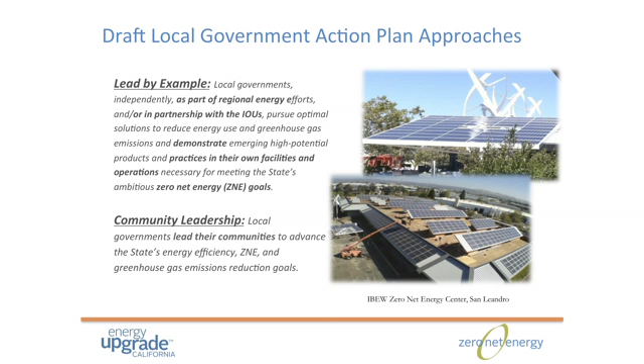We're doing a lot of action plans, so you may have heard of a local government action plan. These are just some examples of ways: community leadership, leading by example. This is really vague kind of terms. These are the kinds of ideas going into a draft local government action plan being developed right now, led by Joseph Oldham. So you'll be hearing more about that.

I don't want to go through all of these because we want to get to our speakers, but I also wanted to mention that we've worked on a zero net energy residential action plan. It's been a long time in the making, and it's making its way through the final review process now at the Energy Commission and the PUC, and we hope to complete that soon.

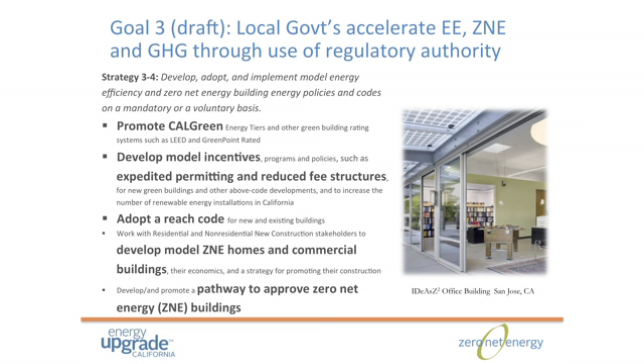We do have this website up as a resource if you're interested in residential homes and what's going on in that space. The utilities are launching a pretty innovative new residential new construction incentive design as of July 1st this year to go along with the code. So if you're interested in learning more about that, why don't you go ahead and talk to me later.

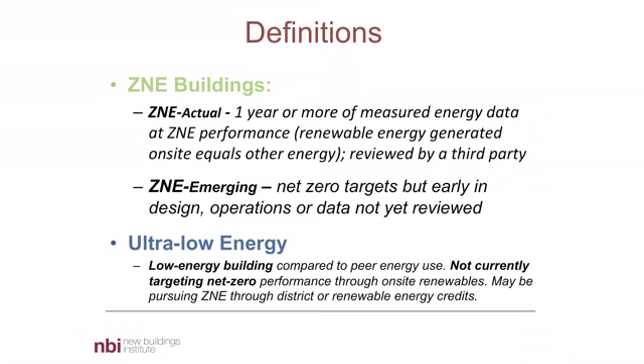This is really important because this is the leading edge of these. From our perspective, and I think this is beginning to be more broadly shared, while it's elegant to produce your energy on site, that's not the only way to go. Equally important to us is what we'd call ultra-low energy buildings that have about that same level of energy performance—using maybe a third of the energy of a standard U.S. building or lower. For the more technical among you, these buildings would generally be below 30 kBTU per square foot, varying by climate and building design.

But you can get the renewables somewhere else—from a community scale project, and we're seeing more and more of those, especially on university campuses and Army bases. Fort Collins, Colorado, which is not an Army base, is doing zero net energy, and we're seeing this crop up in other communities. Or you can just get it off the grid. Sometimes those options are cheaper, or, do we want to cut down all the trees to get renewable energy? Or what do we do with high-rise buildings, where it's very difficult to get PV on them?

We think it's equally important to track these things. We just redid this study, and as you can see, before we had just under 100 buildings, and now we're up around 200. This thing has doubled in 2 years across the country. A lot of these are in this emerging category, so we're seeing real growth.

In many ways, for those of you who've worked in green building, this parallels the initial early-year growth of the U.S. Green Building Council and their LEED rating system. We've got a wide variety of buildings showing up—small and medium commercial offices, and not just commercial offices, this is a big need for local governments too. A lot of what you're doing is smaller office buildings. K through 12 schools are coming on strong, and in combination with universities, about half the projects now are education related.

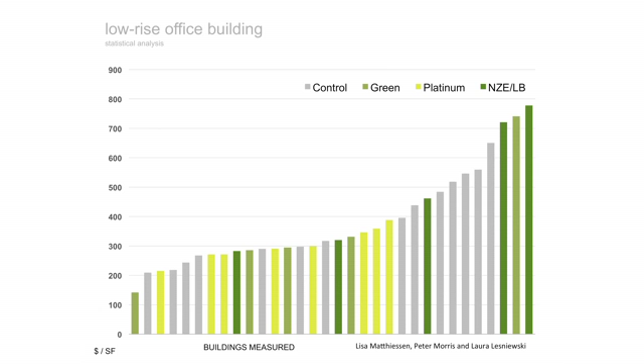So what's interesting is that net zero energy buildings, or buildings that meet the living building challenge, are the really dark green buildings. Just to interpret this graph, every bar represents a building, and these horizontal lines represent $100 a square foot, $200 a square foot, 300. So you see, as most people would expect, we've got a couple of very expensive buildings that were built to living building or net zero energy. But you see, somewhat unexpectedly, that we've got some dark green buildings that are right down here in the average cost of construction.

And what we've found so far, it's hard to look at a couple hundred buildings and say you have a strong data set. You have a lot of stories is what you have. But we've found that there are a group of buildings that get built for the standard cost of construction, and there are a group of buildings that get built between 12 and 15%, maybe 10 to 15% additional cost. So this thing is not fixed.

So it's not like I can predict the cost of construction for any building you might want to take on. What I can tell you is that if you make net zero energy a priority in your cost of construction, there's a lot of opportunities to trade things off in commercial buildings. Just to mention one, a lot of commercial buildings have a lot of glass on offices. If you actually replace the glass with an insulated wall, the building costs less and it performs better. So some of these things are very simple.

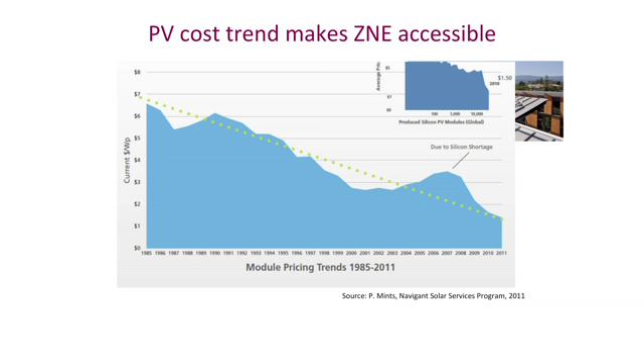Orienting the building correctly and those sorts of things are really important. So these are all good things to take a look at. And PV costs are just going down. This is affecting the general PV market, and I won't get into that, but it's also important for net zero energy, since we're changing the economics of these things as we move ahead.

We just completed, in conjunction with a couple of key partners - again, the International Living Future Institute and Skanska, which is a major contractor and developer - a study for the District of Columbia. D.C. was asked the question: what are we going to do here at the center of U.S. government for our future construction? Can we move to net zero and the living building challenge there?

I see I'm missing a slide. I tried to replace this slide, but it's my fault - I had a slide that blew up because there were too many graphics.

This is a standard building built in Iowa, and the state of Iowa put a little label on it saying, this is every building - because it's a two-story concrete tilt-up structure that looks just like so many other buildings you've ever seen built. But it's very low energy, not zero net energy - excuse me, they've got some renewables, but not all renewables. So this is an extremely efficient building that will put some renewables on there.

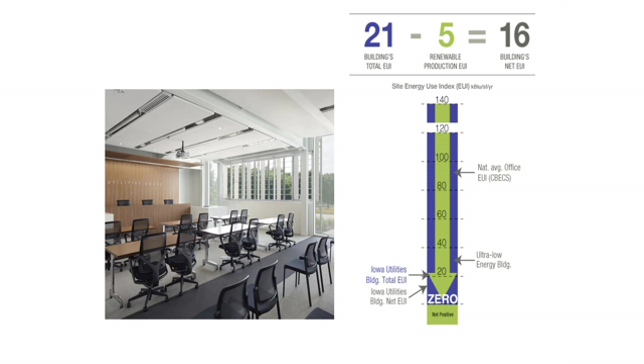But you can see this is actually a hearing room that's daylit. How many hearing rooms have you seen that are daylit and have good control on the daylighting so you don't get too much daylight penetration? So it's good for reducing lighting use, and you can also reduce cooling use from these sorts of strategies. This next one I'm going to go through a bit because I think it's a great story.

A local architecture firm decided that instead of building themselves a new office, they'd take this thing on. They weren't dissuaded when they walked in and saw the state of repair. I'm mentioning this because coming out of the recession, there are a lot of buildings out there - it might be a strip mall, lots of different kinds of things - but we've seen some interesting net zero energy buildings built in strip malls. The building you mentioned, DNR, is in a standard suburban-looking one-story office park. We see those kinds of things go on.

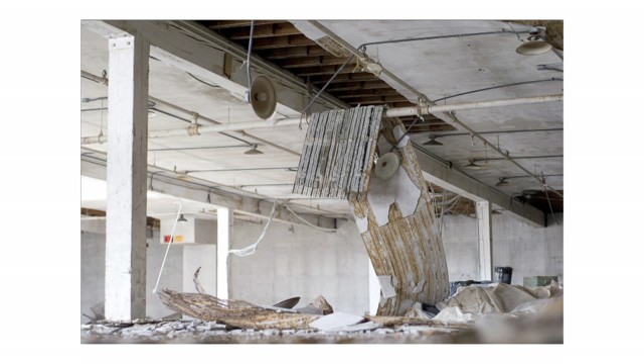And the daylighting - this building had some natural daylighting. A lot of buildings have some natural daylighting if you can exploit it. And what we needed, like in our big pavilion over there, was these big-ass fans - and Big Ass Fans is actually a brand name. You'd think people would be quiet about it, but you'll read reviews where it says the heating costs this much per year, the lighting costs this much, and the big-ass fan costs 0.5% of our energy to run.

So these things are well-known, but they're designed to serve giant spaces, and they work pretty cool. This brings it back to the definition of community. You take something that looks like that building did, unoccupied for 30 years, and bring it back, and it becomes a center of your community. While this is an architect's office, it now serves multiple functions, but this could be any kind of office space you could have.

So that's my presentation in a nutshell. We have a ton of information for you. One of the things we have is we've looked at 9 different policies—I included 8 of them here—that you can look at to advance net zero energy within your communities. A codes roadmap, so stretch codes and CALGreen, all that kind of stuff.

Benchmarking, I think I've heard a lot about that. If you've got a muni utility, rate policies can be really important. There's some major fights around the country these days on net energy metering. And utility programs, I don't have to tell you about that. There can be incentive programs and savings by design—CHIP is certainly one of those—but those are different options. There can be different kinds of tax incentives or other incentives available within local government, density bonus, fast permitting, or some sort of local taxing district.

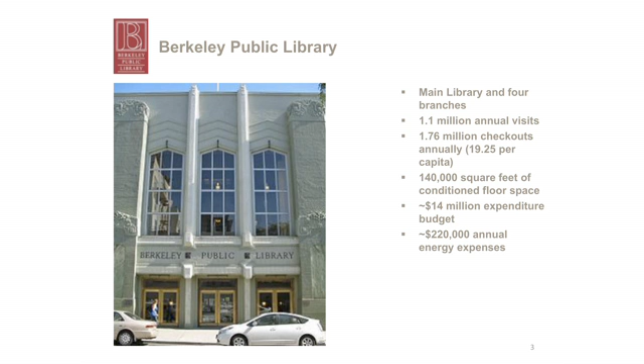So a little bit about the Berkeley Library - it's one of several branches. We've got major circulation in Berkeley, and there's a lot of interest in this. We've got a fairly large budget for the libraries - $220,000 annually out of a $14 million budget - but the energy is substantial and it's something that needs to be controlled and managed so we can provide better services.

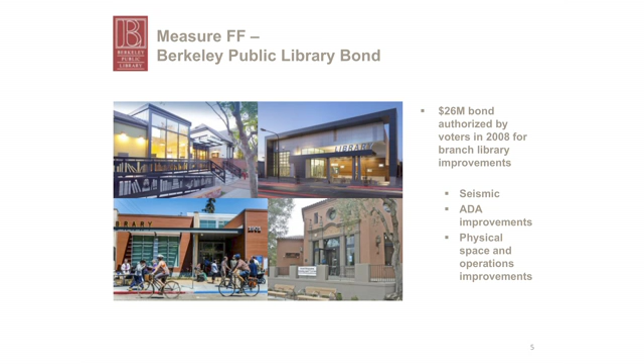So the policy drivers behind this are a climate action plan, which has goals for 33% reduction in carbon emissions from city facilities by 2020, and LEED Silver for all new construction and renovation in the municipal sector. That's not such a high goal, but it was something that got us started. And then the driver for this project was that there's a $26 million bond issued for seismic improvements and ADA improvements, and we used that to make a zero net energy building.

So in answer to the question, what do you have to do to get one of these? You have to ask, right? And we asked indirectly through our policy drivers - I think we would have done it differently if we had known what was possible. We would have asked for a design alternate that would include zero net energy. As it is, we didn't, but we referred to our city policies in the solicitation, and the best response we got came from a team that proposed a zero net energy building.

And I'm going to be fairly short in my presentation. I'm going to turn it over to Jared so he can talk to you about how that building functions. But I wanted to let you know about how we procured it.

The design effort was fueled in part by Savings by Design, the statewide utility-funded program, and they covered basically the design increment of the design cost for this. This was essential because the capital cost didn't turn out to be that much - the design cost turned out to be the major increment, and that funded a lot of the upfront architectural work, which was essential to making sure they could actually bid this project and complete it.

It was all modeled by PG&E, and PG&E helped the design team come up with this plan. The metrics on this project: $7.5 million total budget. Again, the incremental cost, about $60,000, was covered by PG&E Savings by Design. We estimate about a $250,000 incremental cost for the capital, but the building came in under budget, and in part we think that might be due to the fact it had less mechanical systems in it.

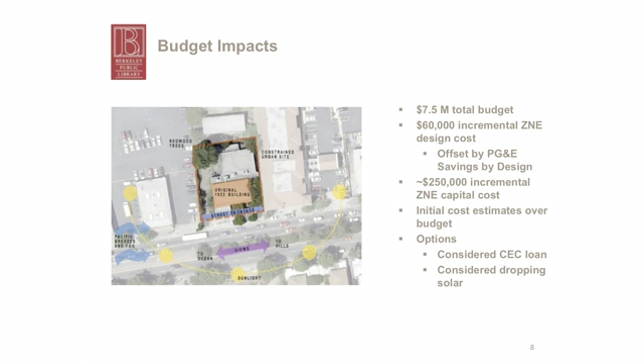And we thought of different options for funding it. We thought about a CEC loan. We considered dropping solar, but when it came in under budget, we went ahead with it anyway.

I want to spend most of my time on this slide, because this is the actual building performance on 15-minute intervals, averaged from January to May. And what you'll see is really obvious - we have a base load running. We're not quite sure what all of that is. We'll get into that.

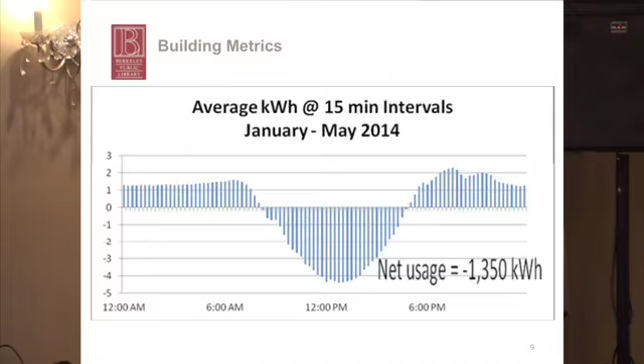When the sun comes up, we are generating. In the first 5 months of the year, we generated a little bit more than we used, so it's performing pretty well so far. We started hitting zero net energy in March. January and February we were a little over, but as of March we started going under the wire.

Dave talked about the importance of operations in this, and this next slide will show, yeah, operations are important. This is a brand new building. This is PG&E's meter, and this is the sum of the 4 panel meters that we have. That gap looks rather small, but when you add this gap to this gap, it becomes really big. Basically, the difference between the 2 meters is basically double.

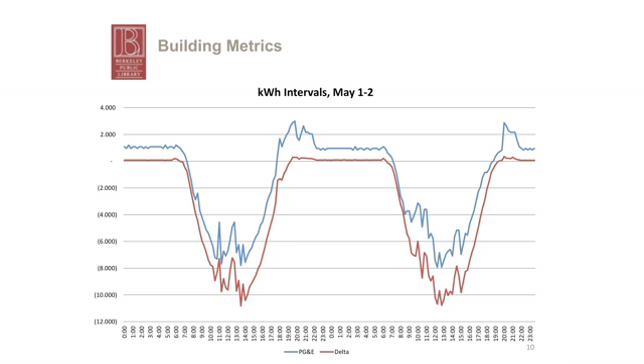So we've got to close that gap. The other thing we find is that we have a fairly large base load according to PG&E's meter, so we've got to find that. Right now, since our panel meters aren't working well, we've got to calibrate those and then find out what that phantom load is. So we're pleased with the way it's operating. We're hitting zero net from here. We know we've got some more work to do to calibrate it and tune it up and make sure it continues to operate at this level or better.

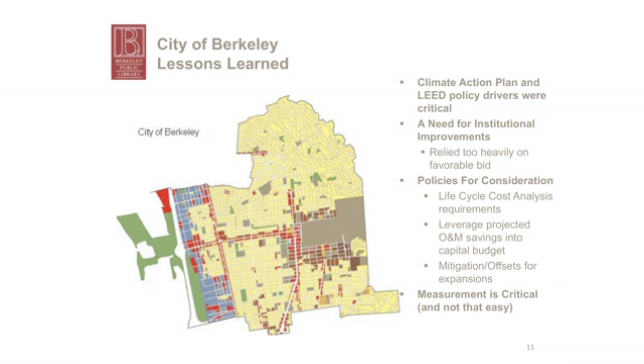A couple things I want to close with before I turn it over to Jared. Policy drivers were important. We relied too heavily on the favorable bid. I would have liked to include zero net in the solicitation document next time. Policies that would help are life cycle cost requirements for solicitations, leveraging O&M savings into the capital budget. These are basic things that are fairly hard to do in local governments, but we need to figure out how to do it, and also mitigation offsets for expansion. If we do expand city facilities in the future, we need to say we've got to offset any of those expansions with improvements elsewhere or on that site.

And that's it. I'm going to turn it over to Jared.

Thank you. I'm Jared, the project architect on this project. To somebody's point about architects going to sculptural school, I went to Cal Poly, so all my undergraduate years were about straw bale and climate responsive design. This project speaks a lot to my career.

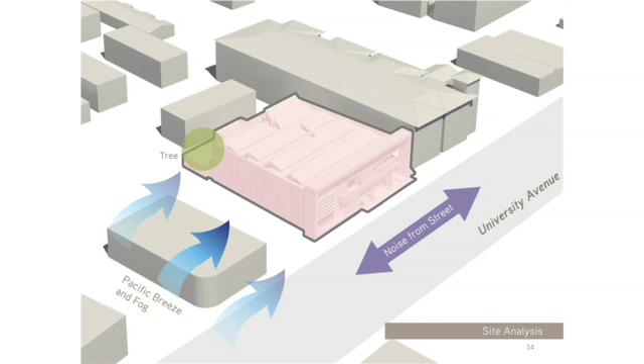It's a great project. To give you an idea, if you've never been to Berkeley, it's right here on University Avenue, a major thoroughfare with lots of trucks and heavy traffic. We have the bay all the way down here, which is great because we get breezes coming from the bay over the building. There's an adjacent 4-story building on University Avenue, and we designed this building with that in mind.

If you were walking down the street where the existing library was and didn't realize there was a library there, you'd be forgiven, because very few people knew there was a library there—even the people who live in the neighborhood. I'm joking.

One of the things that's really important is to understand your energy budget and to know how much power you can generate on site. We did a lot of energy modeling in this project, and it's really important. If you're going to go for a zero net energy building, you have to do that. The energy modeling is critical, as well as your climate analysis of the site. You really have to know what the weather, the sun, the wind, and the terrain will do for you on that site.

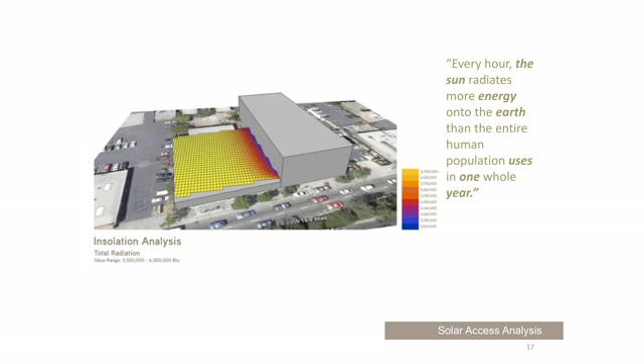One of the things we had to do was understand that there's a 4-story building next to us and a strip mall to the west. They could build a 4-story building next to us in the future, so we know the max height in that zone is going to be around 4 stories. We did various studies to test different roof heights and settled on 24 feet, which would minimize any shadowing on our PV, since PV was going to be what we used to generate power.

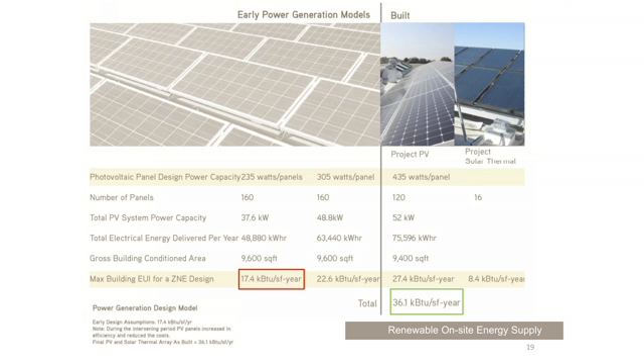When we first designed the building, our energy budget was 17.4 kBTU per square foot a year. As the design progressed and PV technology improved, that number started to increase. By the time we bid the project, we were looking at 435 watts for the same price. So for the same effect, with 40 fewer panels, we now had 36.1 kBTUs per square foot per year—double what we initially planned for, and we're not even counting solar thermal yet.

Climate analysis: these are the wind roses, showing you where the majority of your wind is coming from. Psychrometric charts give you strategies for incorporating passive design into your building. This is a comfort chart showing where the comfort zone is based on the median temperatures throughout the year in Berkeley.

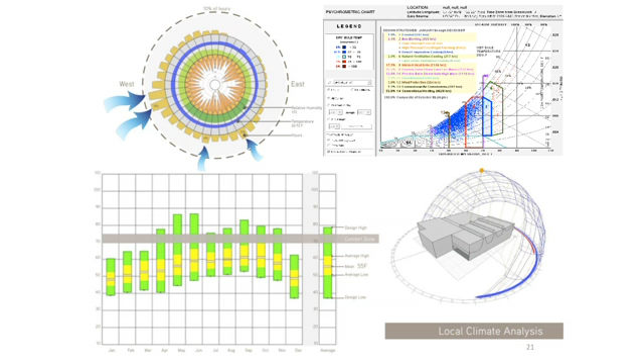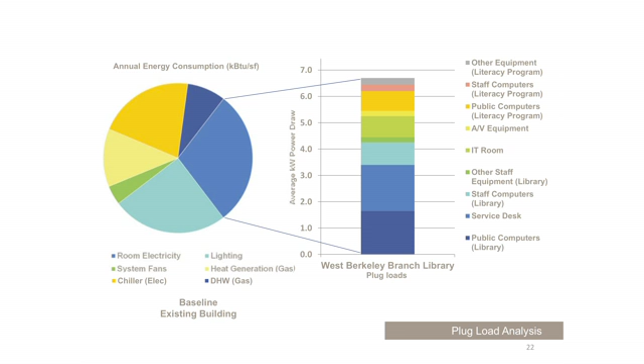We did a lot of daylight analysis, since daylighting plays a very important part in this building. One other thing I encourage everyone to do is look at your loads—these are your plug loads. The building itself you can somewhat control, but plug loads like computers and printers are cultural, based on how people work. If you can redefine the way people work in the building, you can substantially reduce the amount of energy the building uses.

Daylighting analysis—we ran through and looked at the amount of light coming through here. I'll have a lot of photos later showing the quality of light in the building. If you can daylight your building properly, you can cut down on the amount of lights on throughout the day. Here, for example, there's lots of sun outside, yet we have lights on—given it's a different kind of building.

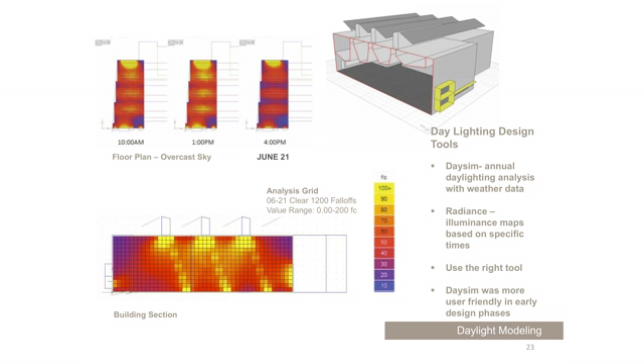CFD, computational fluid dynamics. If you're going to do a passive design building like this, you need to know how the wind will work with your building. As I mentioned, we had a lot of traffic on University Avenue, which means a lot of noise and dust. At the same time, the cooling winds we want from the bay are blowing from that direction.

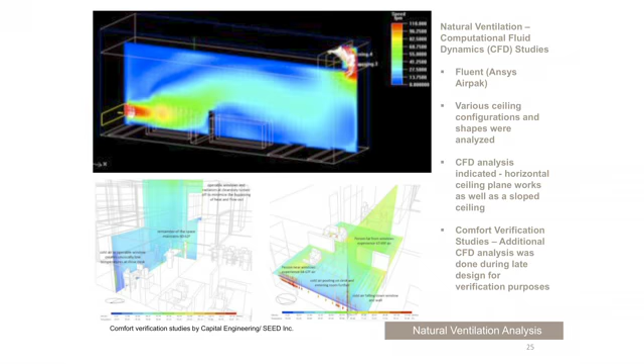So one strategy we came up with was, instead of having windows on University Avenue, we created a wind chimney set back from the avenue. When wind blows over the building, it creates a negative pressure zone there, pulling warm air out of the building, which is replaced by cool air coming in from the northern part of the building, moving right through the space.

One thing we did during late design was carry out comfort verification studies, because the client needed to feel comfortable with the idea. When you go through this process, people who buy in at the beginning may change their minds since it's still fairly new—it can be very scary. So we ran a number of comfort verification studies to show that what we designed would work in almost all the spaces.

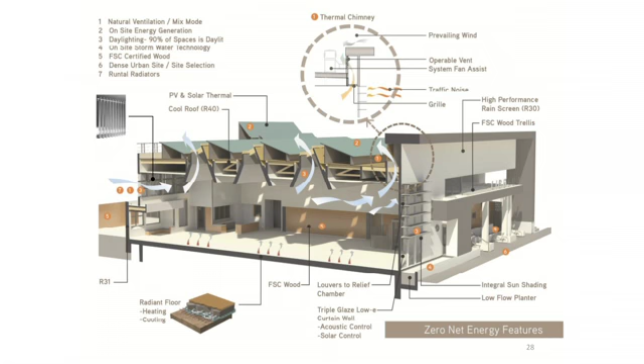In the heating season, we have radiant floor heating working off our solar thermal system. We have three small package units on the roof that generate supplemental heat when there's an overcast sky—those are all electric. There is no gas in this building, none, so it's greenhouse gas free.

In the early cooling season, as we move into spring, the wind chimney opens up the windows here, and we get breezes coming through the building—cool air moving through.

It's not a breeze, you won't actually feel a breeze coming through here, and it vents out this way. When it gets warmer, the skylights open up and the hot air goes out.

Everything is tied to the building management system. When it gets warmer still, we have fans, big-ass fans, and they come out and vent through the building also. The fan creates air movement, and that adds to your comfort.

And then when it gets really warm, the windows shut. And then those three heat pumps we have on the roof generate supplementary cooling through the radiant slab. And we can still vent.

Now, the one thing about the heating season is that when all the windows are closed and we're using radiant floor heating, well, you need fresh air, right? So the windows will open when we have sensors all throughout the building. When they detect higher levels of carbon dioxide, the windows will open.

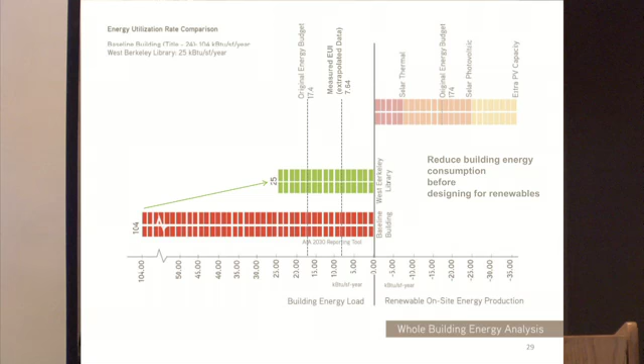So this is our energy model that we created. The AIA 2030 reporting tool says for libraries throughout the nation, the energy utilization rate is 104K BTUs per square foot a year.

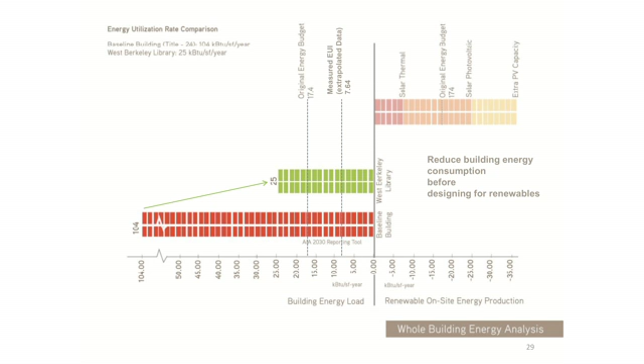Our target was 17.4. We have to use Energy Pro to model our energy because of Title 24 in the state of California. If you guys have played around with Energy Pro, it doesn't understand radiant slabs, and it sure doesn't understand passive ventilation, so it thinks our building's at 25. In reality, back in May, we were at 7.64. We're actually now in this region because we're positive.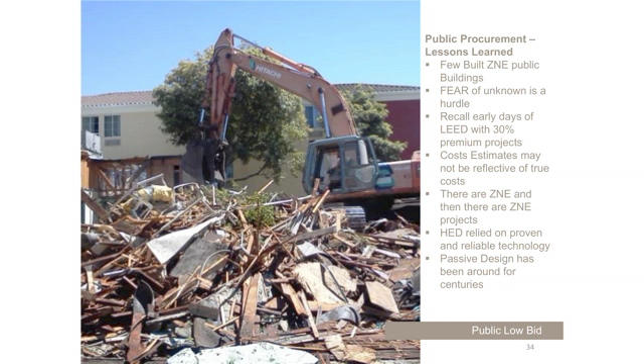So even though we have the governor's mandate out there for 2025 for state-owned buildings, even though we have the 2030 goal, we have 0 public buildings. So once we are verified in about 6 months or so, we'll probably be the first public zero net energy building in the state of California.

So how many contractors are going to have experience with ZNE? Zero. So when the contractor bid on the project, and it was West Bay, they bid low, right? On public projects, you're going to get that. They had no clue they were going to be building a zero net energy building, and I realized that when I got in. Okay, so I got to go through this really fast.

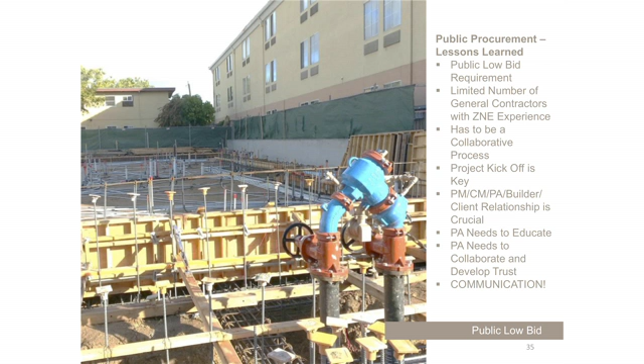I have a minute, so you got to work with them really, really well. The building's really complex, everything has to be figured out from the very beginning. Now I'll tell you one thing: we turn around RFIs and submittals in 3 to 5 days, way faster than usual, because we needed to help them.

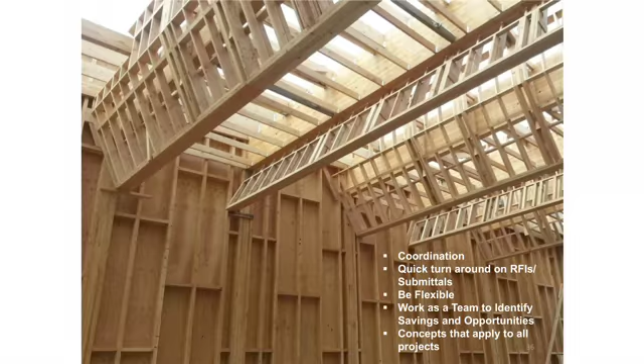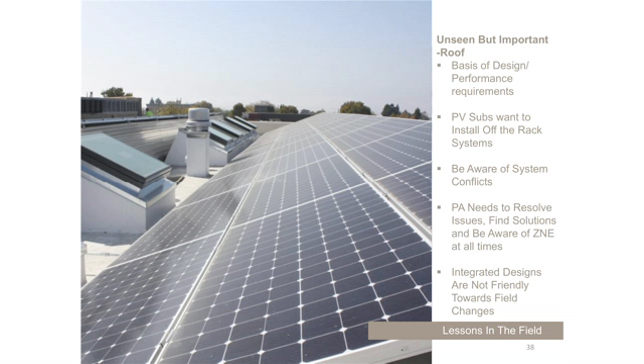Wood frame. Okay, this is the heart of the system, this is the heart of the building. These are renewables. And when you deal with PV, you got to remember it's design build, right? You have to define the design criteria, but they're going to want to come down there and plunk down whatever they want up there. If you don't tell them how to do it, they're going to drop whatever they can on your roof, and it may not be the way you want it to perform.

Solar thermal, everything's up on stanchions. This way you can re-roof the roof in the future and not worry about the technology.

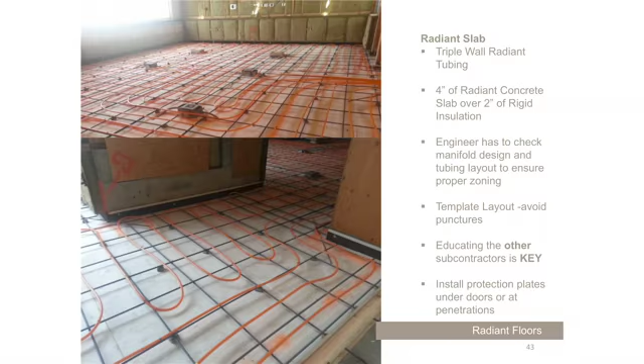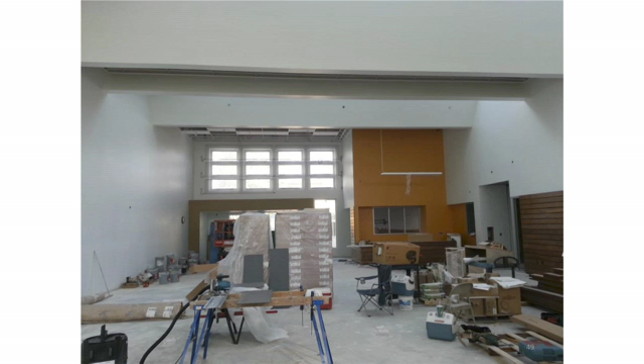Okay, radiant slabs, I'm going to go through this really, really fast. This is our natural ventilation, that's the wind chimney that you see there, that's when it's almost finished. And that's how the air flows through the windows on the north. This is all operable, and you can see the radiators on the windows.

Same here, this is the staff workroom. And then daylight—even when the building is under construction, the quality of light in the space is really nice. I call this a chapel, but it's actually a teen room.

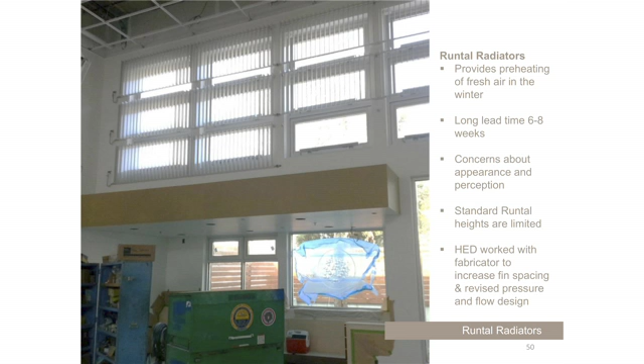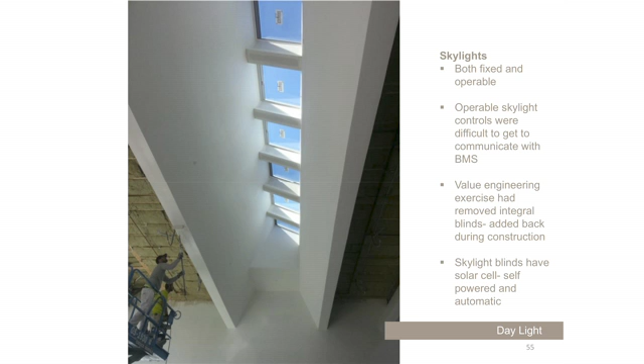Okay, rain screen system, I'll be done really fast. One of the things we did was help the contractor a lot by changing all our details. We changed our details in a way that reduced the amount of hat furring on the building by 30%. So it's a two-way street.

We use rock wool in the walls, so we have R30 in the walls using rock wool, and R41 in the roofs. So we got an extremely tight envelope, and the rain screen helps.

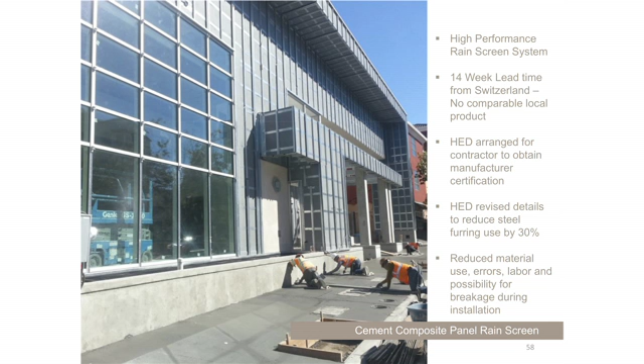So construction cost, $365 right? Our building, right, 9,400 square feet thereabouts. Estimate was 7.5, the bid was 5.5, right? Final construction cost was 5.56. That was 1.3% in change orders, final approved.

Okay, construction cost $592.30. Now look at the other libraries—these two are renovations, so they'll run about the same because renovations tend to be more expensive. South Branch, okay, 8,700 square feet, just a little bit smaller than us, their cost was $574 a square foot. If you're talking about premium, that's only an $18 premium, right? On a 9,400 square foot building, it's minimal.

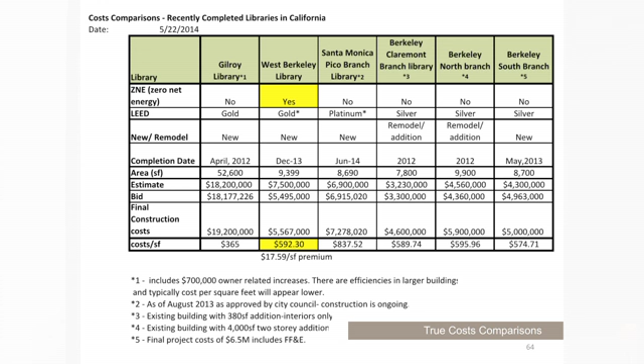It really is. Now look at Santa Monica Pico Branch—not to pick on them, there's reasons for it, they're going for platinum, right? We're actually on track for platinum. Construction cost 7.27, actually that's not quite final yet, I need to get those numbers. But construction cost was $837.52. So when people say there's a premium on zero net energy, I say, show me the money.

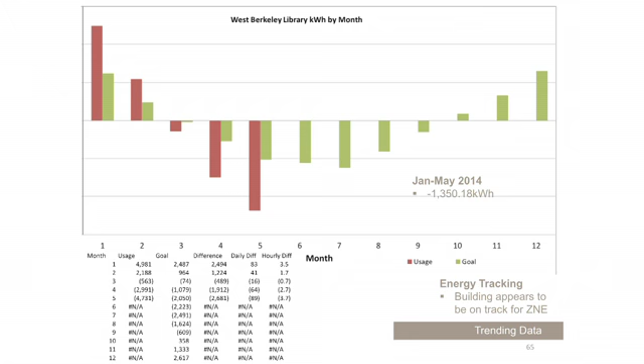Almost similar slides, you can see how the building's been performing. It's doing really, really well. If you go to this link, you can see an energy dashboard every day, and I'm on it every day just to see how the building is performing. It's sort of my hobby.

Photos, and like I say, if you want a tour, get the card from me. I actually have handouts for this—if you want a one-page handout description of the building, when I'm done I'll hand it out. Feel free to contact me for a tour. Thank you very much.

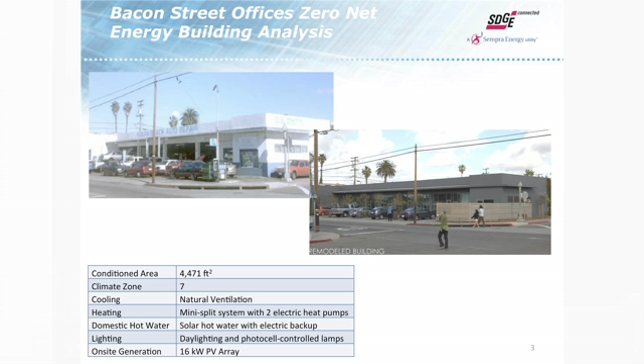That's about 5,000 square feet. It's got natural ventilation. It's got a mini split heat system that was put in just a year ago, because up to that point this building had been installed without one. This has been up since 2010.

The architectural firm, with only about 10 employees, made the commitment that they were going to go through the wintertime without heat. There were a lot of people with coats and sweaters on when you walked in there, but they made the commitment to do that. There's a lot of extensive daylighting, and there's about a 16 kW PV array on the roof that I'll go through and tell you a little bit about.

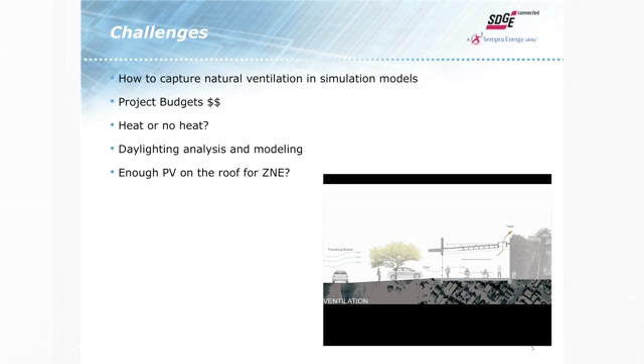Some of the challenges in the ZNE building that we talked about in San Diego, we've heard already—one of the biggest things was Energy Pro. It doesn't model natural ventilation. And if you got a building at the beach, wouldn't you want to take advantage of that? Which they did. One of the challenges we had as we were providing resources was how are you going to model natural ventilation in Energy Pro and take credit for it from an energy savings perspective?

So what we did is we hired one of the best guys in the country up at UCSD here in San Diego to do a computational fluid dynamics diagram for us, and he wrote a paper that we based a lot of our assumptions on for the savings this particular building could get. You can see down here, it's hard to see, but there are operable windows here.

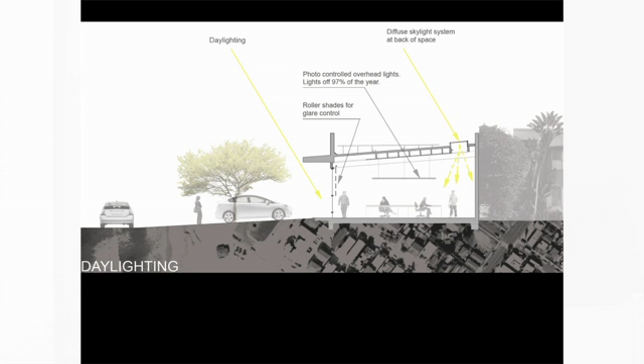We got windows up here, and it creates a natural stack effect. On a day like today, there isn't a light on in this building. All the windows are open, and all the skylights are open, creating a very nice work environment in here.

But we talked about budgets—that was the big thing with the owners. So we brought a lot of resources into this project to help offset some of these incremental costs we've talked about. They had the issue of whether to heat the building or not. They decided not to originally, and just a year ago, we put these mini splits in.

We did an extensive daylighting analysis and modeling, and was there enough PV on the roof to really make the building Zero Net Energy? That was one of the keys, because it's a fairly small footprint at only 5,000 square feet and not a lot of roof space, which I'll show you.

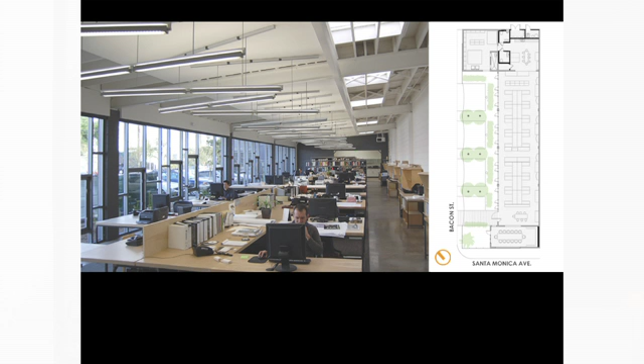Here's a bigger diagram of that. So we got a lot of the daylighting coming in through here for them. These are all Super T8 lights—I've got a picture I'll show you. But this was all some of the challenges, trying to make all this work as a balancing act, again and again.

We've heard about one of the keys here. This is the inside, and you can see all the principals here, all the guys. There's only 10 or 11 people here—this is a fairly small office. You can see the diagram here on the right-hand side.

It's a very small building, but it took a lot of coordination to make this happen, even with a professional design team, and this was the first one they did. They made a commitment—they're an award-winning architectural firm here in town. So if anybody here is from City of San Diego looking to build a Zero Net Energy building, I highly recommend you hire these guys. They did our Energy Innovation Center, they did the first Zero Net Energy building—really great guys to work with.

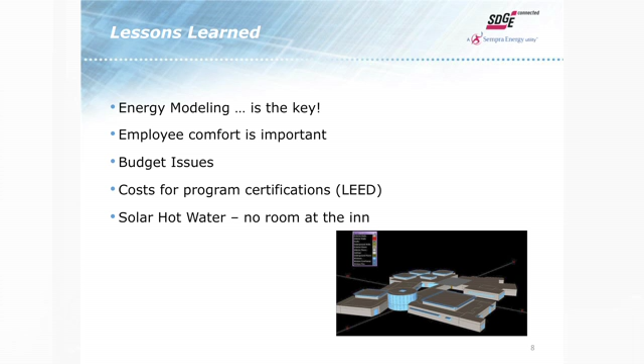We talked about this earlier—energy modeling is the absolute key, because you're going to do it again and again as you swap out things in the building, take the orientation, look at different things. It's key to making sure your assumptions are correct. That was one thing we stepped up and did from a utility standpoint—we provided all the modeling, all the services, because they didn't have the resources to pay for all that. So we got heavily involved in that with some of our expertise.

They wanted to make sure employee comfort was important. They had budget issues we've talked about. They went after LEED Platinum, which they got. They also wanted to put in some solar hot water, but there really wasn't enough roof space, so there wasn't enough room at the inn to make it work.

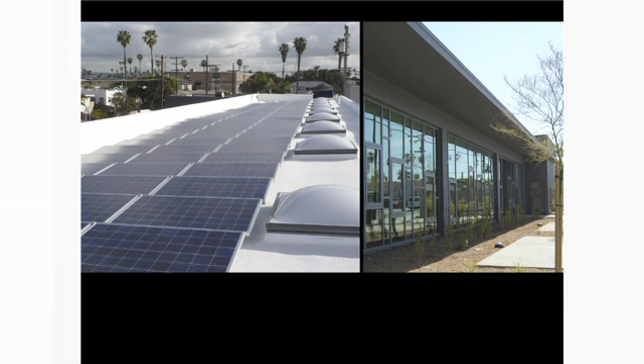You can see over here to the left, that's the roof up here—there's the skylights, which open up when the windows open up, and there's all the PV, 17 panels up there. Here's the front with the operable windows—that all opens up. There's a big, beautiful door here on a huge hinge that opens up. It's pretty cool, a very unique project.

Now, this is a quick summary of the Bacon Street offices as to what has happened. We went out and did a measurement evaluation study that we completed about 4 or 5 months ago, and this building is overproducing. We thought it was going to underproduce—it's overproducing by almost 20%, which was interesting since this was really the first shot out of the box from a design standpoint. We didn't know where they'd make the bogey, and now they're overproducing by 20% on a month-to-month basis, year in and year out. This has been up since 2010.

The kBtus per square foot is 9.9. I think Dave mentioned the average is 20 or 25 for ZNE buildings, right Dave? Averaging right around 20. Yeah, and we got one here at 9.9, actually performing at 9.9, verified savings.

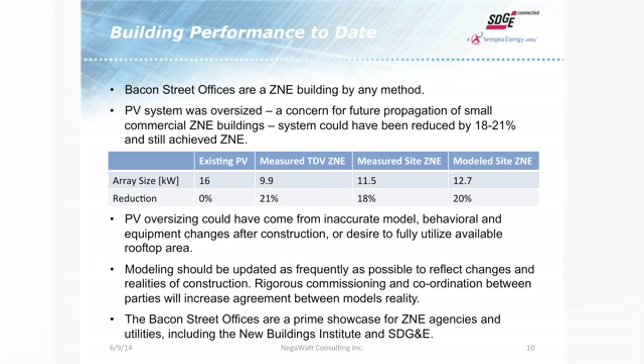So this is a very, very unique building, and for the very first one, we did a lot of work here to make this work.

One of the things we've talked about, I saw the presentation from Berkeley, is what do the utilities bring to the table? How can we help you with some of the resources that we have? Because after all, when the CPUC sets the goal for this, how can we help you make that happen? So there's an extensive design assist that we worked on this project and others that want to go really low ZNE or very energy efficient buildings. We can help do some of the modeling, we can help you with the resources. There's a lot of things we can do.

We talked about the incentives that Savings by Design has to offset those incremental costs. We can help pay for natural ventilation studies because that's going to be a key part of almost every building, particularly here in San Diego and up in the Bay Area.

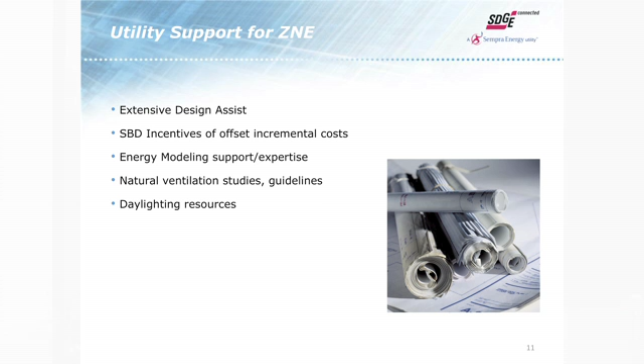And daylighting resources, that was one of the biggest things we had to do, from a daylight standpoint. I think we reran those models probably 10 or 15 times with that Super T8 lighting system to make sure the sensors worked so the lights weren't on in the middle of the day.

Because Dave's been in this building, and when I took him there, it was an overcast, cloudy day, and it was perfectly fine. There was probably 45, 50-foot candles of light at every desk. Didn't even need a light on. But as you know, that's a challenge, because sometimes lighting controls don't always talk to the ballasts and the lights the way they should.

I can highly recommend that's the very first step. After you have hired a design firm, call us, okay? Because we definitely want to get involved.